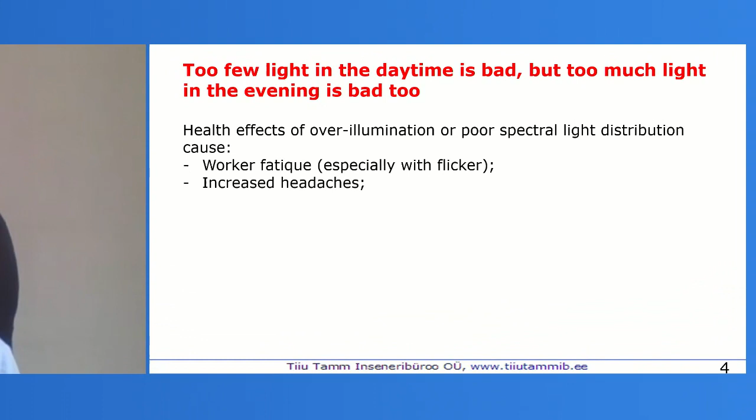Because of health effects, over-illumination or poor spectral light distribution causes worker fatigue, increased headaches, medical stress, decrease in sexual function, increased anxiety, and increased symptoms of different diseases, as well as circadian rhythm disruption due to wrong timing of light.

For example, too much light in the evening or at night makes us awake, and it's hard to go to sleep. Too little light all day means that melatonin levels are very high in the bloodstream, and we are tired and don't want to work. Over a long period, this means depression, etc. But none of us want to be in depression.

Around the world, there are companies everywhere who study office conditions and how these conditions impact productivity. Here you can see one of these companies, a short report from Germany.

Here you can see where it is from.

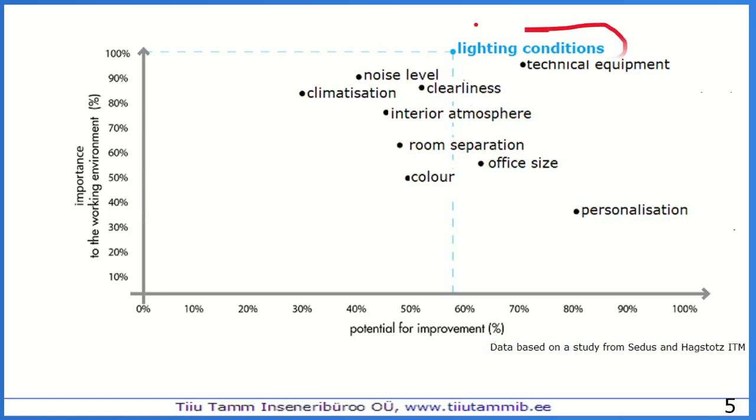As you can see on this graph, workers understand that lighting conditions are the most important, but satisfaction is under 60%. In modern offices, we hear often that everything is done for the workers.

There are plants, fitness possibilities, you can even take your pet with you, etc. But nobody talks about lighting and climate. Harvard health scientists found that if indoor lighting environment and ventilation are in good condition, cognitive functions work better. Together, it has a positive impact on our sleep and wellness too.

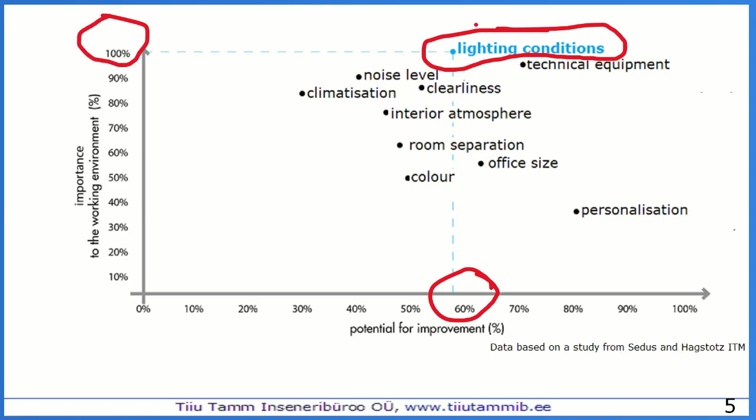Good visual communication and recognition of objects require cylindrical illuminance calculations. I don't know how it is in Latvia and Lithuania, but unfortunately Estonian electric engineers do not calculate this in their projects. They concentrate only on the horizontal illuminance on the task area.

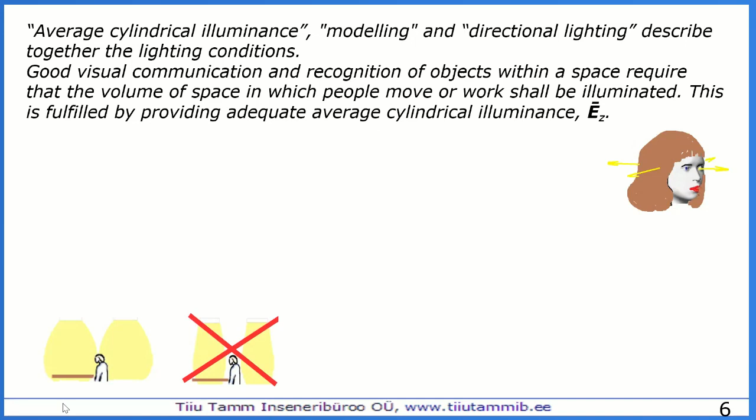This is a small problem all the time. I can't hide the screen sharing, but here you can see: if here is normal illuminance and the light comes and is ahead of our eyes, that's all normal. But if it happens that the table is illuminated normally, but nothing comes to our eyes, then we are not awake.

Melatonin is not suppressed. However, it does not matter whether we use in this room tunable white light to get human-centric light or not. We talk so much about human-centric lighting, about tunable white light in offices, but the most important thing is how the light comes to our eyes. Of course, we have to avoid glare.

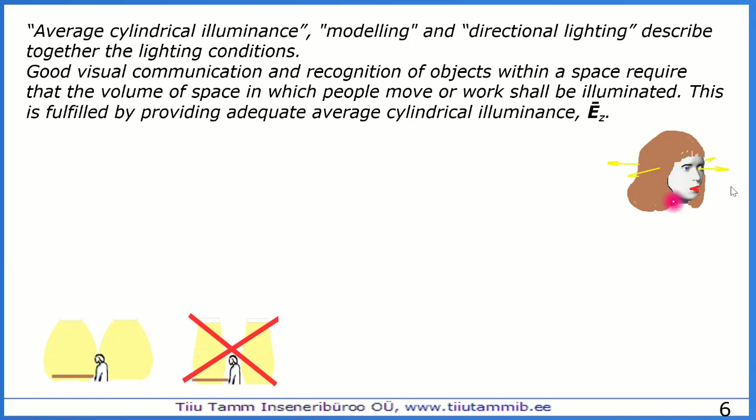Cylindrical illuminance, you can see how it is calculated. It's here. By standard, the height of the horizontal plane shall be above the floor: for seated people, 1.2 meters; for standing people, 1.6 meters.

Special attention is given to those spaces where visual recognition and communication has higher importance. In offices, it has to be at least 150 lux.

In the next standard version, we hope it will come out soon this year. There are different cylindrical illuminance demands for every task area - I forgot to mention this.

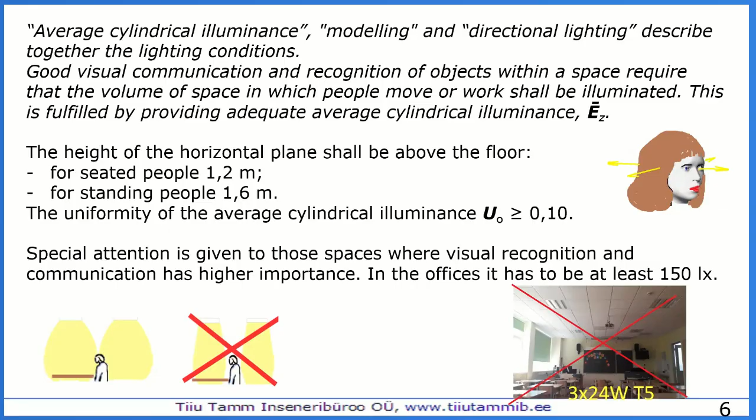Now I show one picture. This picture is from one school, first form, in Estonia some years ago. Very low ceiling and very strong light from a parabolic optic system gave cylindrical illuminance of only 27 to 42 lux. Eyes of the children were in pain in the evenings, and the municipality took it to court of justice and won. But this is not the only example - I can give so many different examples where cylindrical illuminance is a problem.

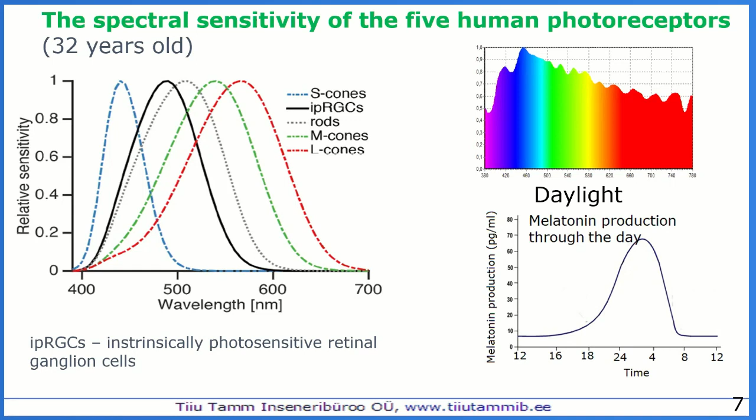Traditional lux meters measure visual stimulus response. Here is visible light - I forgot to show it. Melanopic lighting is lighting that is tuned to both visual and non-visual responses to light. It means our brain reacts to the light and wakes us or prepares us to go to sleep.

The biological effects of light on humans are possible to measure. Who met me last year in Riga may remember I had this kind of spectrometer. It is from Asensetek Lighting Passport. This is from Gigahertz Optic spectrometer, and this is GL Optics Spectis. All these spectrometers can measure how light helps us stay awake or prepares us to go to sleep.

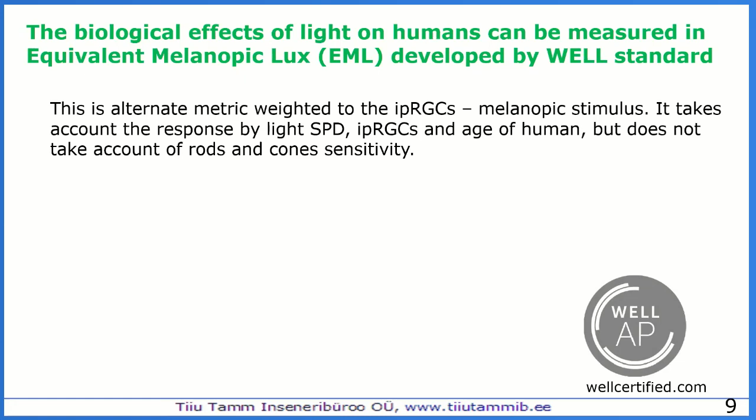I think you all know something about green building standards - they are very different. Mostly they contain energy saving and environmental materials. The WELL standard is more than a green building standard; it means everything is important - not only energy saving and environmental materials, but the human itself too. It means light, food, communication, relations, etc.

I suggest you watch a little bit yourself what demands are in the WELL standard. I can say in Estonia there is still no project by the WELL standard. Lithuania got some years ago 2 first standard certifications by the WELL standard, and in Latvia, I don't know correctly, there are 1 or 2 projects. In Estonia, nothing.

Equivalent melanopic lux is an alternate metric weighted to the intrinsically photosensitive retinal ganglion cells and melanopic stimulus. It takes into account IPRGC response by light spectrum quality and quantity and age of human, but does not take into account rods and cones sensitivity.

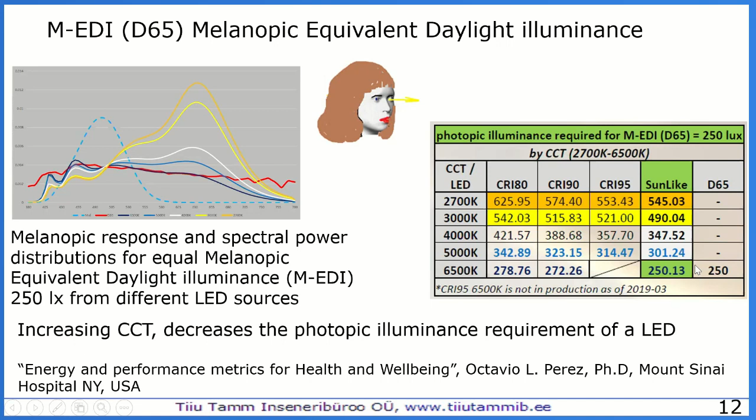Maybe you have heard already about double dynamic lighting. It is a very new topic. Tridonic, Fagerhult, iGuzzini, Thorn/Zumtobel sponsored Aalborg University scientists' research on whether it's possible to define dynamic light settings responding to the dynamics of daylight in combination of direct and diffuse lighting.

They used tunable white luminaires in the ceiling with microprismatic optics and 3000 Kelvin spotlights at every working place, in the direction from the window. Just like light changes outside, they changed the light inside. The 3000 Kelvin spots are like sun in the blue sky.

They worked out 7 different scenarios for office work. In the first phase, they studied whether it has a positive impact on work, but not how. The answer was yes. However, the last phase in this study was only 4 months long and there were only 4 participants. The workers described their experiences - they didn't notice the light, but it was comforting in the room.

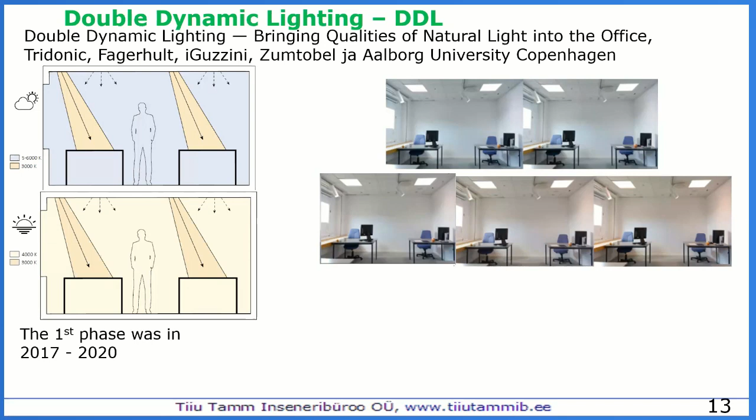Shortly, the lighting CRI was over 90. Lighting correlated color temperature was in front of the eyes between these numbers, as you can see here. It depends on the working table position in the room.

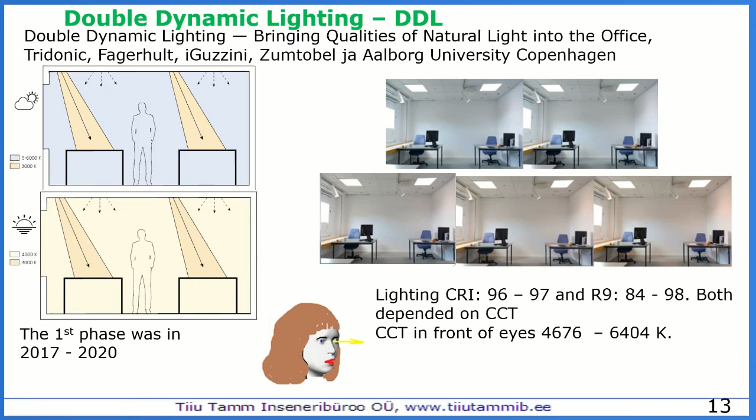And vertical illumination ahead of the eyes was very good.

And if we compare this data with Octavio's table here, we can compare it precisely, even here. We can see that this study is very successful and interesting and has a good idea of how it's possible to achieve circadian effective light.

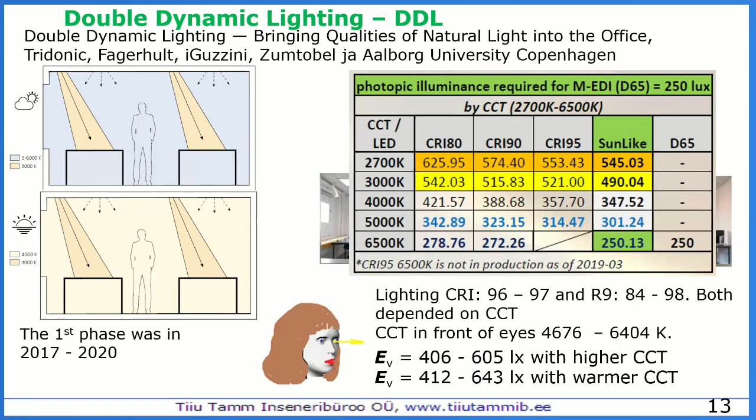I don't know, do you ask the questions now?

No, the question part will be after all your presentations, so you can start to switch on the second presentation. But I have read that Leonardo da Vinci said the best day for painting is a gray day, when there is not too much light, so it's not overlighted. I think you agree with this as well.

I don't know, I don't paint. But still, you know more about light than I think everybody in our audience. And breaking news, our audience is currently more than 100 people. So your audience is listening very carefully. Okay, so it's a little bit scary.

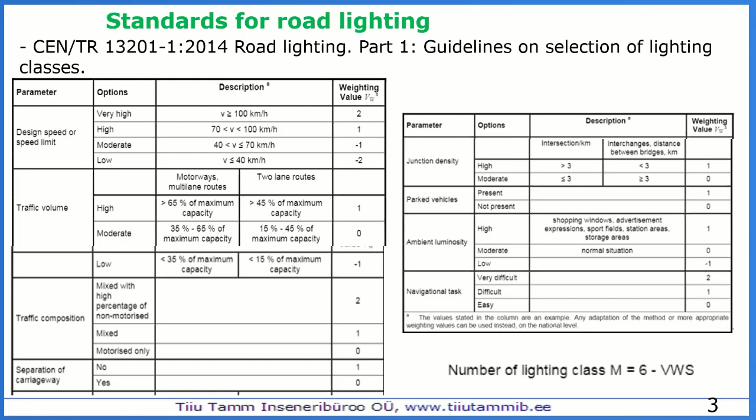Of course, the second part of the standard is important as there are the values for lighting classes, but I want to explain the fifth part of the standard.

To decide between different solutions, it is important to watch the power density indicator and the annual energy consumption indicator, because these numbers show how good a solution is and how much the road lighting electricity will cost.

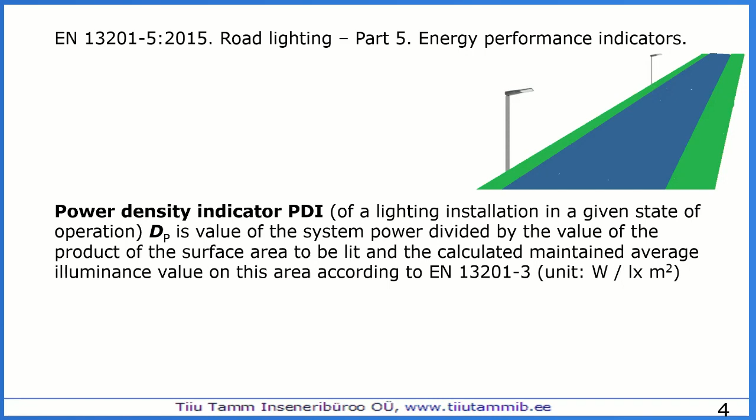Power density indicator shows how precisely the needed area is illuminated. If you illuminate not-needed area too much, the power density indicator is bigger. Annual energy consumption indicator shows how much money the customer spends on energy to light this needed area, only for this needed area. If you light too much not-needed area, the customer must pay much more for lighting energy.

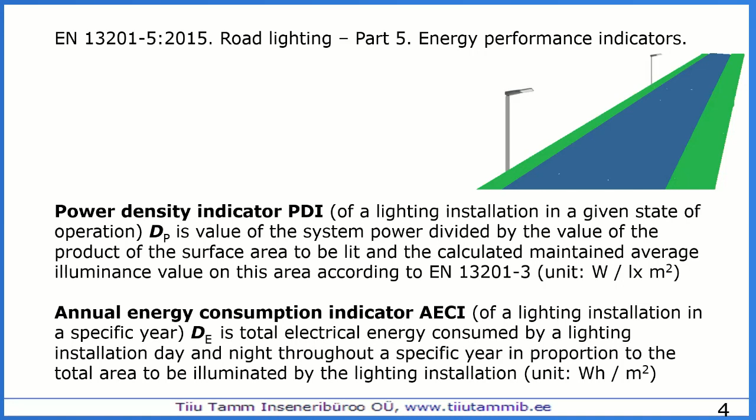Here you can see. Of course, we can watch power per kilometer to say it's the same in this project, but sometimes we have a new installation situation with different luminaires and different distances between poles. Then the power density value and annual energy consumption indicator are the best solution to find what is the best solution.

Unfortunately, most customers look only at procurement expenses, but it's correct to look at all expenses. That means procurement plus energy expenses over 20 years or 25 years.

However, we do not know the energy price, but we know the calculated power density and annual energy consumption indicator. Then we don't need to know the electricity price. Lower values of DE and DP mean better energy performance. They depend on many factors: lighting class, road profile arrangement, width of carriageway and sidewalks, type of light source, quality of optics, etc.

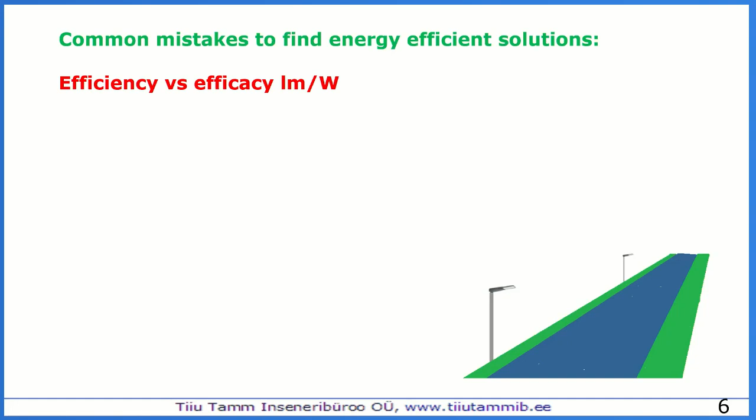Common mistakes to find energy efficient solutions: efficiency versus efficacy in lumen per watt. Everybody talks about efficiency, but they compare efficacy numbers. This is wrong.

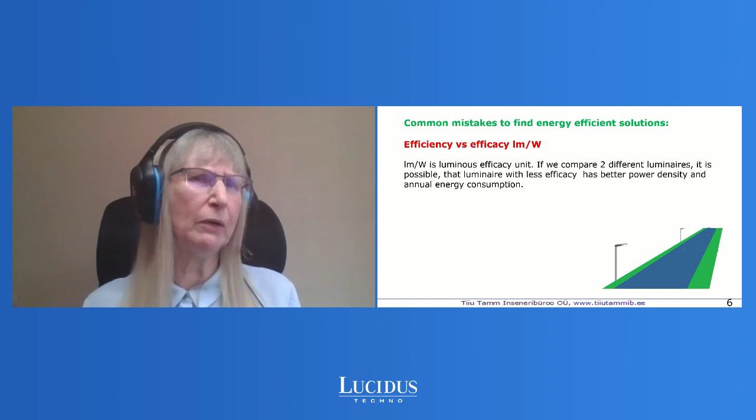Lumen per watt is the luminous efficacy unit. If we compare two different luminaires, it is possible that the luminaire with less efficacy has better power density and annual energy consumption.

Efficiency doesn't matter in this case, because efficiency shows how much light we get out of the luminaire, but not what the light illuminates, how much of it is needed or not needed. Power density indicator together with annual energy consumption indicator helps us find the best solution for years. It means we need to compare solutions with power density and annual energy consumption, not efficacy.

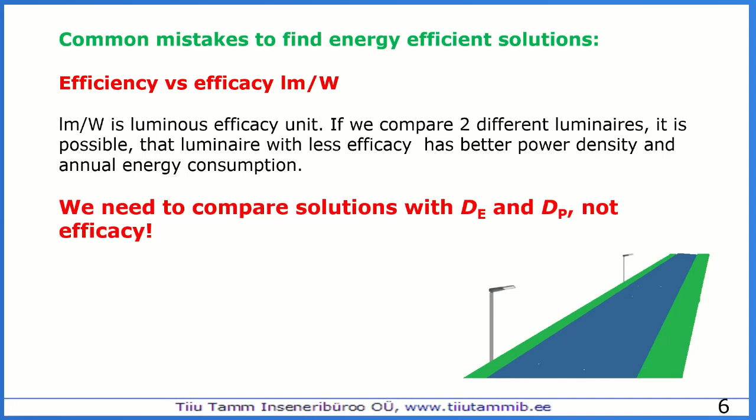The road is 6 meters wide, but the luminaire posts are 6 meters from this roadway. The electric engineer needed to inclinate the console 15 degrees. What does that mean? First, we have light pollution and light trespass.

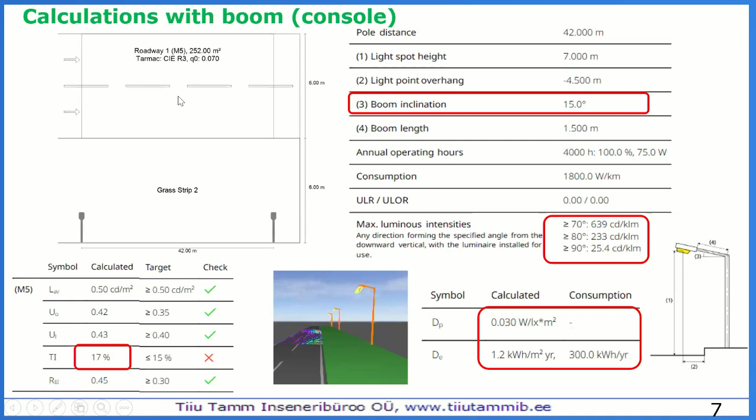Looking at the specification, you can see the light spot height is 7 meters, but in the specification the wooden pole was 9 meters, with 7 meters above ground - I took that from the specification. This picture I took from a side view, and you can see he calculated 7 meters, but the post itself is 7 meters. This means the height used is wrong.

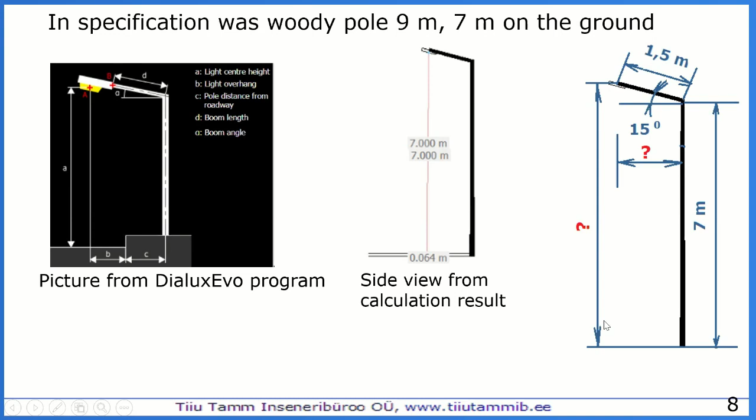Let's calculate this situation properly. We know this is 7 meters, this is 1.5 meters, and here is 15 degrees. We need to know this height, and we need to know the console projection to the ground. If we use a little sine and cosine, we can get all this data.

After a little calculation, we see that the height of the luminaire is, instead of 7 meters, actually 8 meters. And the boom length projection is, instead of 1.5 meters, actually 1.14 meters. This means the overhang is different than he calculated.

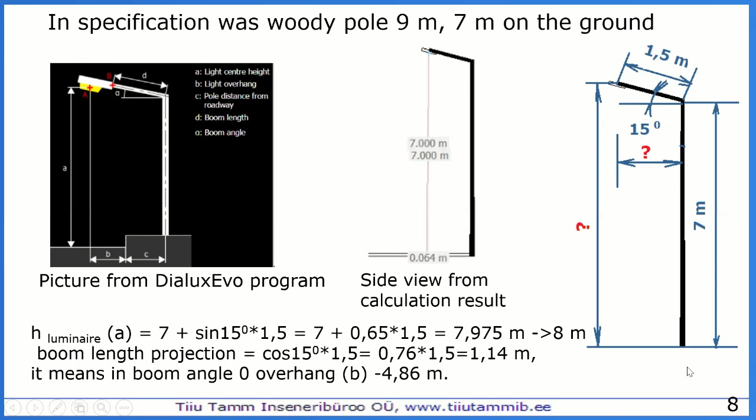Did you understand how our project engineers make mistakes all the time if they use boom inclination?

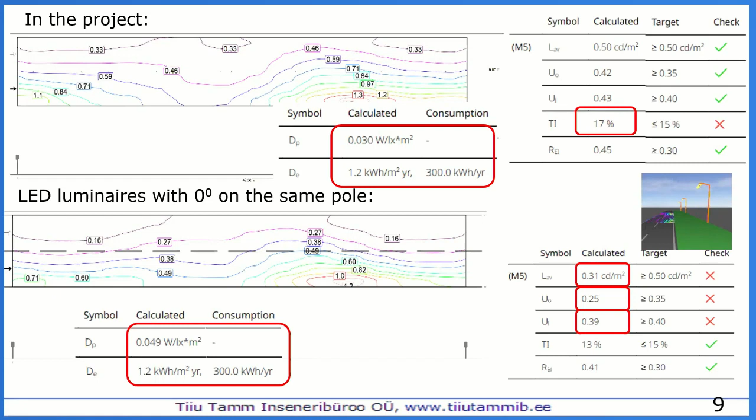This is normal because we use the same luminaires and the distances of the poles are the same. I hope these slides make you think more about this topic when you have to make calculations with angled booms.

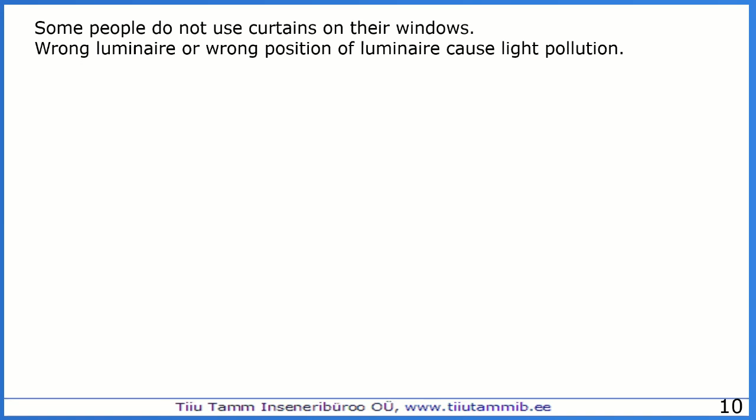Wrong luminaire or wrong position of luminaire causes light pollution. In 2016, the American Medical Association suggested using warmer light sources in areas where people live, due to less glare, melatonin suppression, and circadian disruption.

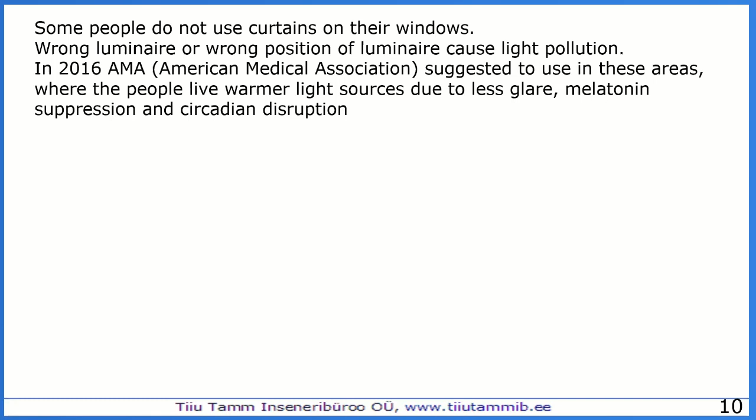Some years there was dispute about this, because producers like to show very good efficacy for their luminaires, and a cold light color mostly gives that possibility. But who is more important - residents or the producer? The producer, or us?

Today we can find many examples where street lighting is not only 2700 Kelvin or less, but even tunable white, to use different light colors at different times.

It means we have to make our projects very correctly.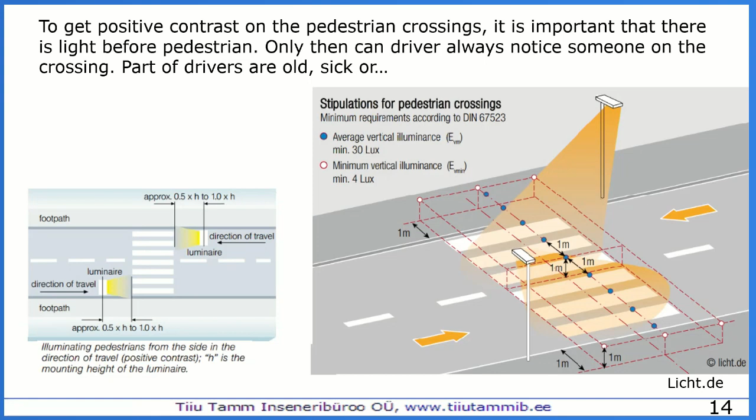At night, we need less light on the roads. There are different possibilities to control night lights. Teachers asked me how to know what lighting level to use at night. If the municipality does not know, likewise we don't know. I didn't notice that in Estonia anybody makes calculations for nighttime with different lighting levels.

However, this possibility is in the standard. Usually the customer decides themselves how much light to give at night. If the customer can change the light level themselves, then usually they decide this by their own eyes. What is the best solution? And we trust them, of course.

If they order luminaires with astrodim or dynadimmer, then they must know how much they want to dim at night. Don't forget that in our climate LED lighting behaves a little differently compared to calculations. It is much colder in our climate, not plus 25 degrees, even in the summer.

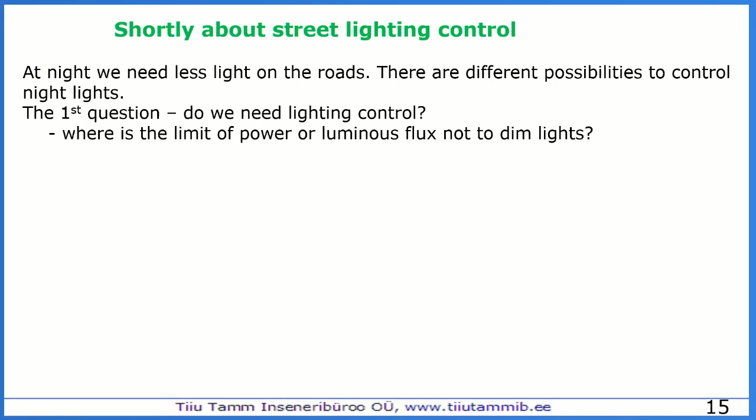The second question: how competent is the customer to use different lighting control systems? Maybe it's enough to use only something like dynadimmer, astrodim, chronodim, etc.

For more complicated systems there is no easy solution. Use D4i luminaires with ready-to-Zhaga nodes. This is a solution that can be built separately at different times, if the customer has no money for all of it or does not know what he wants.

In these luminaires there is a ready DALI net in the luminaire itself, and you can add a sensor or a wireless control node, whatever, whenever.

I asked Estonian outdoor lighting control guys what this means in money, and they answered that one wireless Zhaga node is cheaper, and they like to use it. When I asked the same question of producers, the answer was, it depends. But mostly the final price of the luminaire itself may be a little more expensive, but not always.

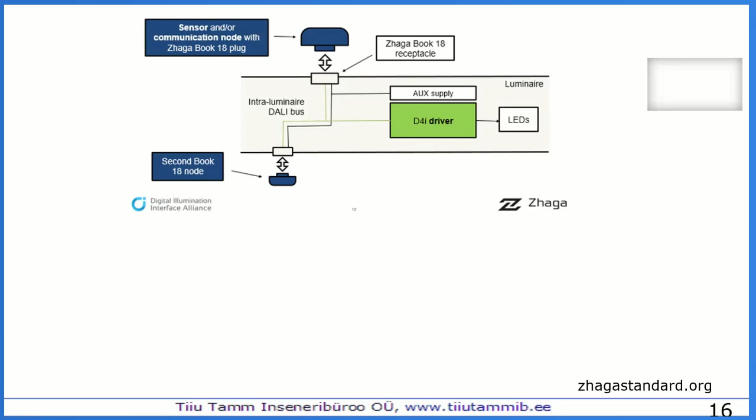Zhaga and D4i certification gives confidence for interoperability - you can use different nodes from different producers.

As my time is soon finished, I will not read these arguments, but I'll show a small Zhaga video, which was made three years ago.

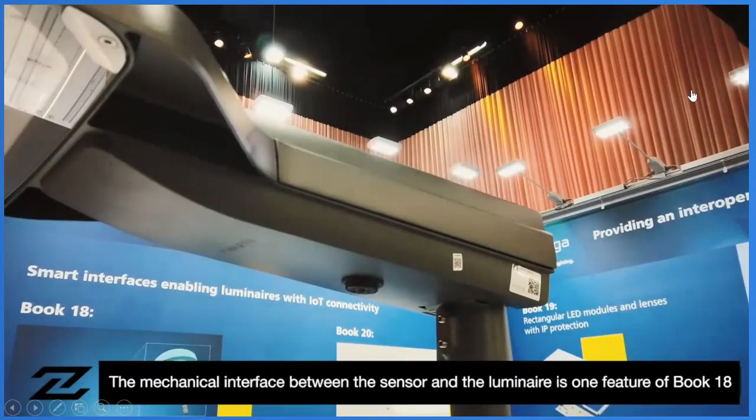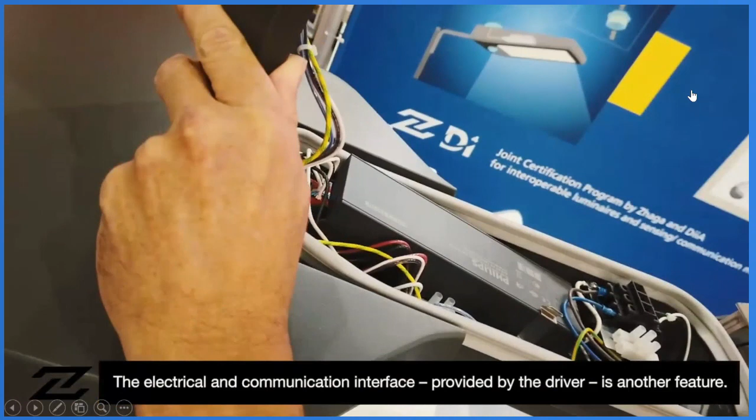I took over the... sorry, it stopped.

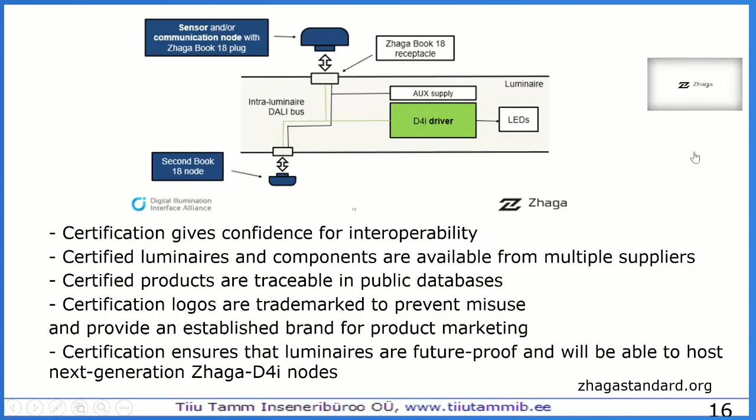Okay, thank you. So as I saw from the presentation, the devil really hides in details. You can make a small mistake in calculations and the result will be really poor. Yes, that's true, it's really important for all designers or planners. But now we can go to the questions part.

I see from the polls that there are some attendees, about 6 of them, who believe that HCL, or human-centric light, really stands for Batman. So we are happy that someone believes in real Batman. But now, do we have any questions from the audience?

About human-centric lighting, I can say we already have so many projects in Estonia, buildings where human-centric lighting is done. But what I wanted to say, it doesn't matter whether you have human-centric lighting. It's very important how much light is coming here. Is it correct light? This is what I wanted to say with my first lecture.